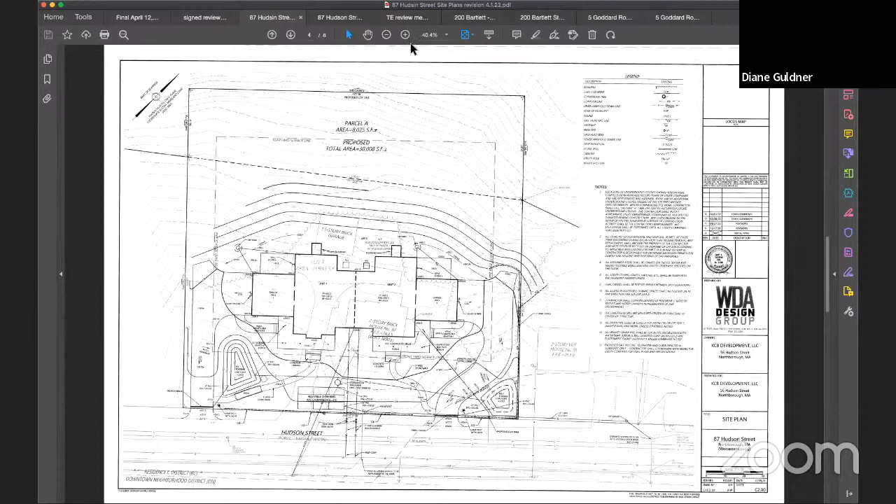How is that? Is that visible? Yes. Yeah, there we go.

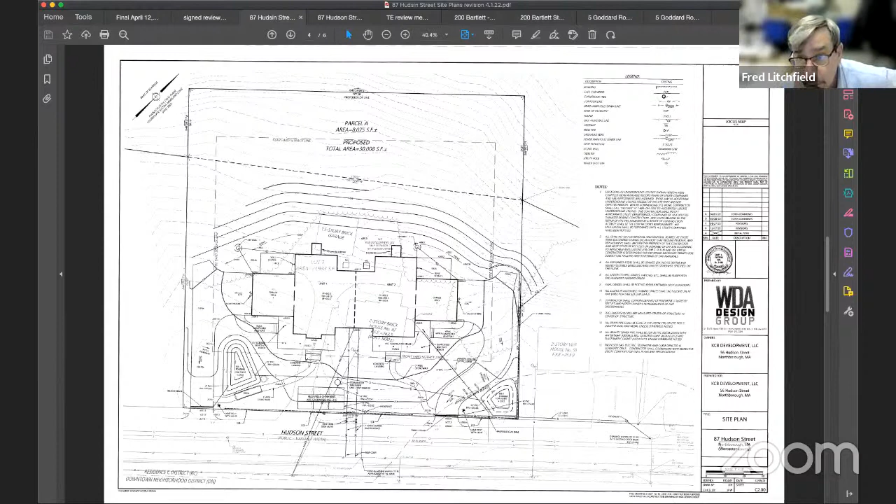So Barry, you want to just explain where everything is? This is the original plan that you submitted with your application, but then today there was a revised plan, so there's a new revision date. Correct. Does my cursor move on your screen? It does not.

So I'll start in the back. You'll see on the back left-hand side, come down a little bit, right in the middle, to the left, that circle right there - that's a dry well that'll take all the roof drainage from the back of the house. That's a dry well for roof runoff. And then on the complete opposite side, there's another one.

And then we propose on the updated plan, if you come to the front of the house and slightly to the right, there will be another one - right around there - to collect that side of the house, front and including the porch. And there'll be one on the opposite side of the house.

With overflows on that going into the forebay, and anything from the driveway on the left-hand side that runs down the road or off the driveway, which will be pitched toward that side, will go into the forebay. And then out of that forebay, about little more than halfway on the right-hand side, there's a drain line that comes out, and there's a drain line there too. Those all go to the middle of the property where there's a circle.

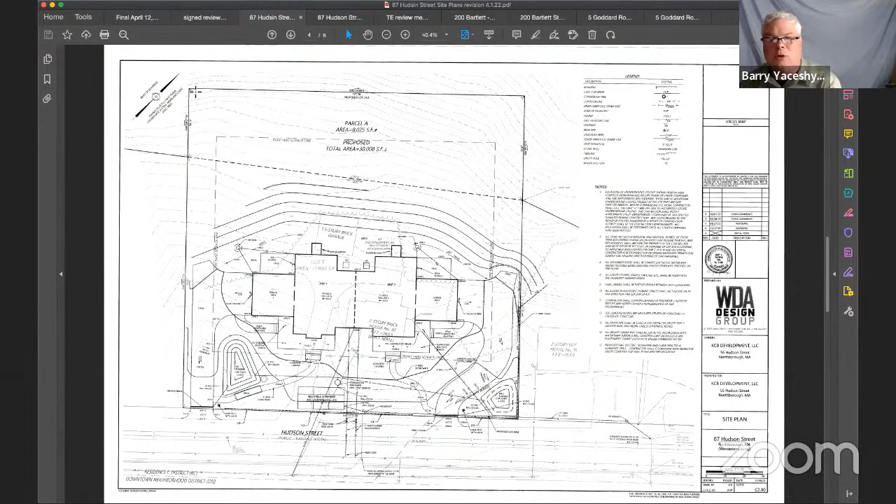Is that visible to everybody? Yes. There you go.

So item one, which is a statement - we've got the calculations. We'll finish those up with these most recent changes, and we will provide the statement of compliance for the section 707-10D 4A5 analysis.

We acknowledge that the zoning bylaws contain more than 20,000 square feet and so forth - that's fine. The impervious cover appears to be greater than 50%, which is true, and we have provided Fred initial calculations of that. We'll get that back with this whole package shortly.

Barry, can you just confirm that the plan you showed with the 4 dry wells captures all of the roof runoff? Yes, that captures all of the roof runoff. And there is a note on the drawings that says all roof runoff shall be directed into roof leaders, directed into one of the 4 dry wells. All right, so we just need to make sure your plans and Tom's architectural plans are synced up when they go to the building inspector. Correct. Okay, I think that should be fine.

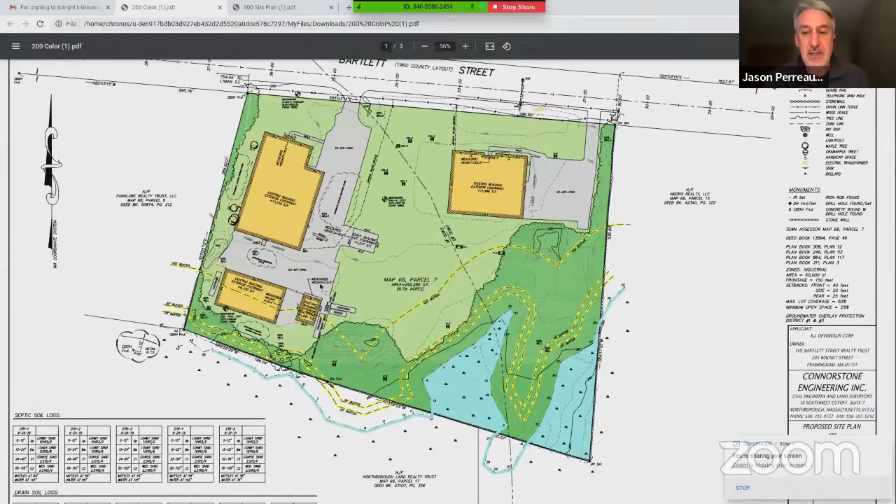Yeah. Would one of you be able to share a plan and illustrate where it's proposed to be in groundwater 1 and where it potentially could be moved to in groundwater 3? Okay, so... let me mute my screen, I'll put it back up. There we go. Okay, yeah.

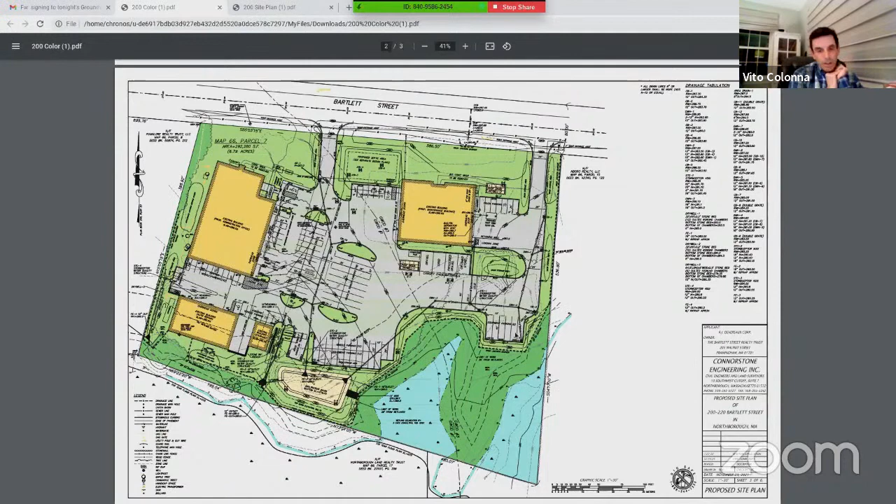So right now it had been proposed down in this area. The groundwater 1 and 3 line runs through the site, kind of right here, so they had their training area down in here. I know they were looking at potentially an option — you could move it over to this location up in here. That's got adequate surrounding clearance for the kind of operation you'd be doing for training.

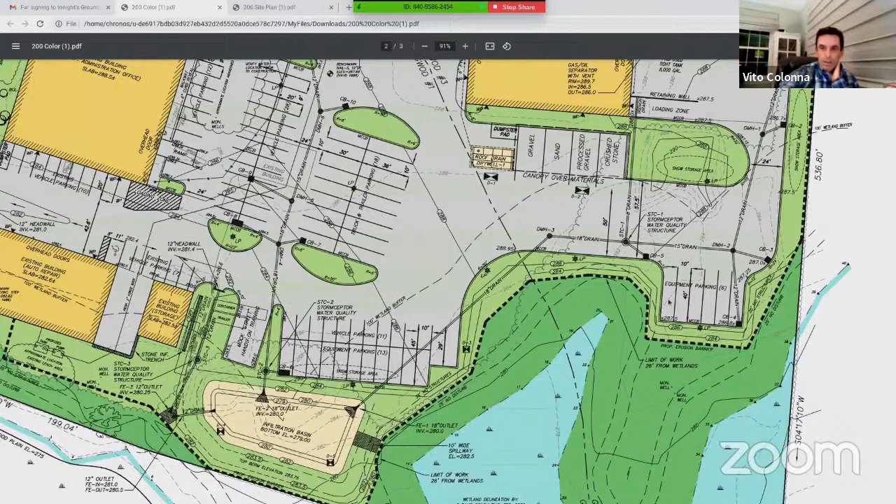It's not too close to everything down here. It's kind of remote, so I think they liked that. It was a little bit away from a few things, and they had their equipment storage a little closer to the building. But there are options to move that if the board would feel more comfortable.

So in the event that you were to move the mock training area to the equipment parking area, would those vehicles be completely relocated, or would it just take a couple of those parking spaces away? It might be a combination, but we'd have to take some of these and put them down there. The overall pavement and impervious area would stay about the same, we'd just shift things around.

And the operation stays the same. Yep. Either way is fine by me.

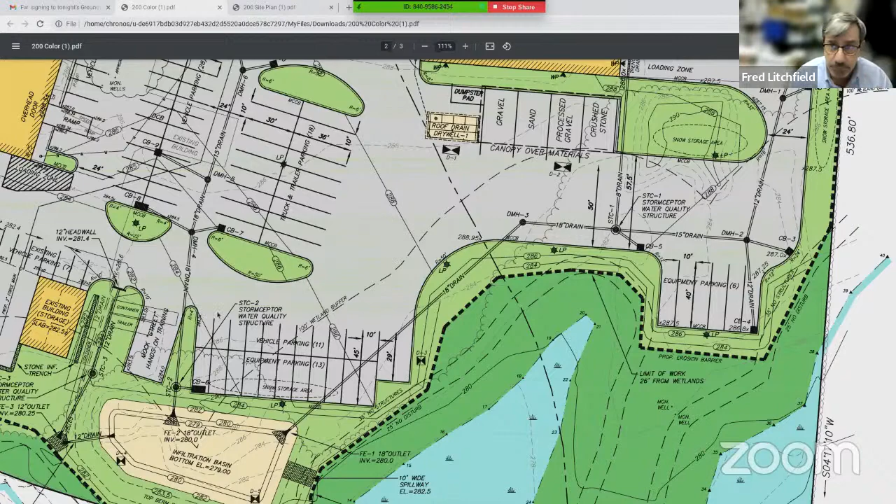Let me poll the committee members. Diane Guldner, do you have a preference? I'd like to see it moved up if it's possible into groundwater 3. Okay, thank you. Anthony Zeiton? I think it would make sense to move it up out of groundwater 1, if possible.

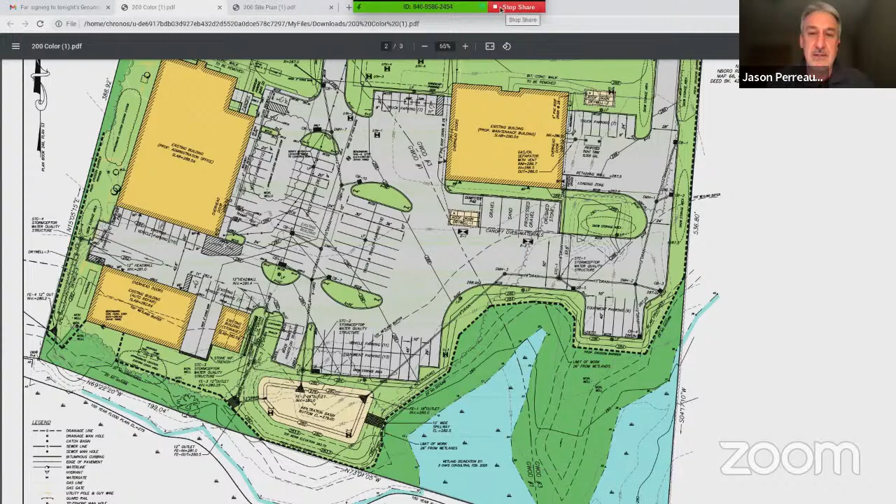And Teresa Capobianco? Groundwater 3, I think would be better. And I'm going to make it unanimous. I think we'd rather see that on the groundwater 3 side, just for that extra measure of protection or guard against any adverse thing that might occur, even if it's unlikely.

Okay, that's fine. I can certainly put that in a memo once we get to the conclusion of the discussion, if there's anything else.

Members, any other concerns or considerations for this? Diane, anything else? Nothing that I can think of now. Anthony, anything else? Nothing more. And Teresa? No, thank you. Okay, I'm satisfied as well.

So I think we just want to make a recommendation. This is a special permit we're referring to now, Fred?

Yes. The letter I drafted explains why they're here. I recommended that you transfer all conditions we sent to the ZBA to the planning board, to include in their special permit for the groundwater, so it's not missed on either side of the property. I acknowledge they may have incorporated some comments from the original variance letter into their site plan, but I'm using a belts and suspenders approach. But the list of chemicals and the way it's stored has not changed.